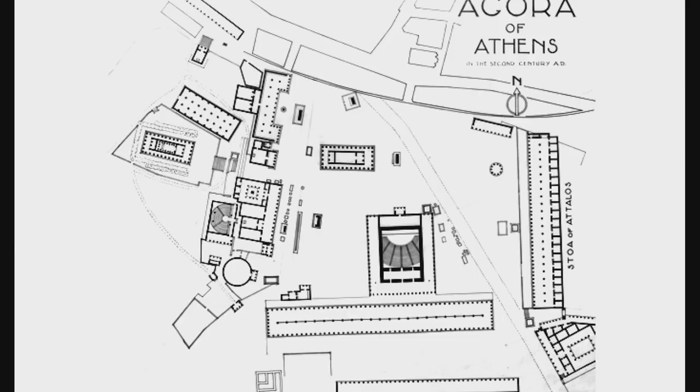There is a rich history in Western culture of how places of interaction between people, spaces of engagement, have been evolving, but they have always had a strong presence. From the Greek agora, which actually means gathering, the political, economic, and social center of the Greek polis, an interstitial space between all the different programs, to the Roman forum, where religious and civic activities blend, with temples, basilicas, shops, markets.

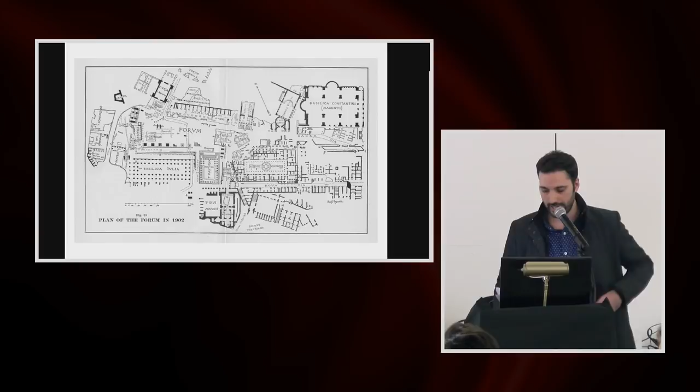Moving forward to the 60s or 70s, the public space had a very strong political connotation, giving certain demonstrations, and that led to the conversations around the right to the city.

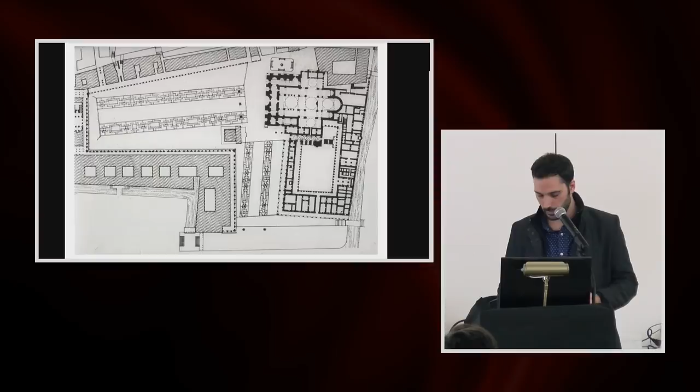However, nowadays we believe the contemporary public space is somehow under threat. There's a reduction in use of public spaces, given the pressure from capital and privatization, and also the development of technology. So public spaces are being reduced, and there's a disconnection between the public space and the user.

So I'm going to explain 4 projects, competitions we've done in the last few years. The first one is called Rethinking Someș. Someș is the name of a river, the main river that crosses the city of Cluj-Napoca in Romania.

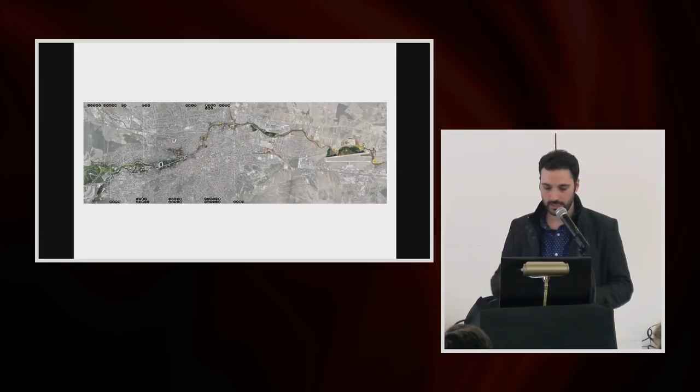This is the proposal throughout its 15 kilometers. One of our main ambitions was to turn this river into the main connector of public spaces, as opposed to understanding the river as one line that divides the city into two parts. Instead, we understood the river as a wide band with the capacity to include public spaces, green spaces, and different ecological environments.

So the project was this system of connected public spaces that also included a network of bike and pedestrian paths. This is one part of it. As you can see, this is, for instance, a stadium, just to give you a sense of the scale of the project. Basically, the whole project consists of public and green spaces next to the river.

The width of the project also varies. It goes from only 20 to 30 meters in some areas, and then as it incorporates new public and green spaces, it gets wider and wider, up to 150 meters.

So as I was mentioning, the river is an element that has the capacity to establish a connection and link a system of public spaces within the city, as opposed to being a barrier.

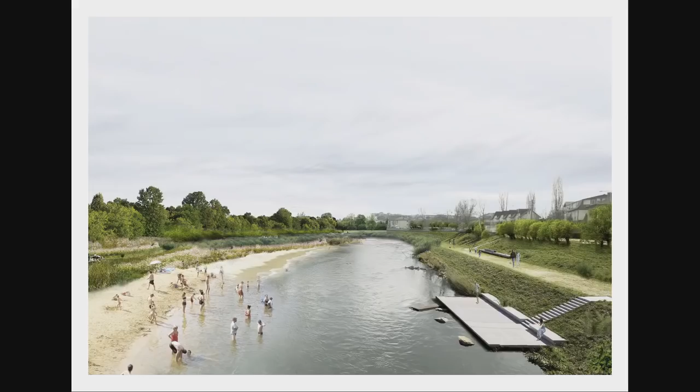Another main goal of the proposal was to somehow bridge the gap between the city and the river by reformulating the edges of the river. In some cases we included beaches, in other cases a system of paths. We made the river accessible in order to bridge that gap.

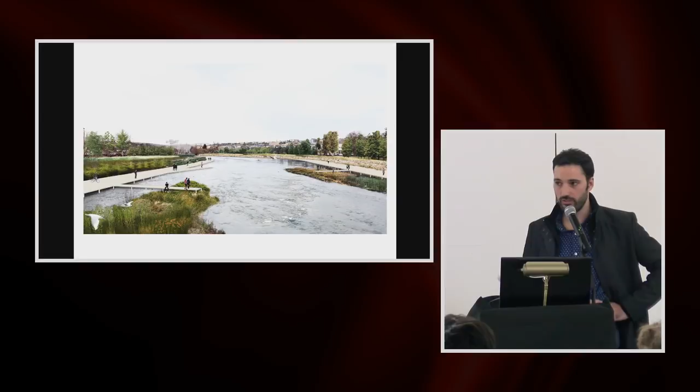The third main goal of the project was to renaturalize the river. As I explained before, the river has been domesticated by this system of concrete walls. So this project aims to allow nature to reconquer the edges of the river and also to reconstruct and recover many of the existing islands.

Even though the relationship between the city and the river is quite conflictive, there are some specific points where residents do take advantage of that asset. So the goal of the project is to serve as a kind of platform for residents to do this kind of activity throughout the 15 kilometers, not just in one specific spot.

So in order to achieve all these goals — the renaturalization of the river, bridging the gap between the river and the city, and understanding the river as an urban connector of public spaces — we had a system of strategies that were applied to the project.

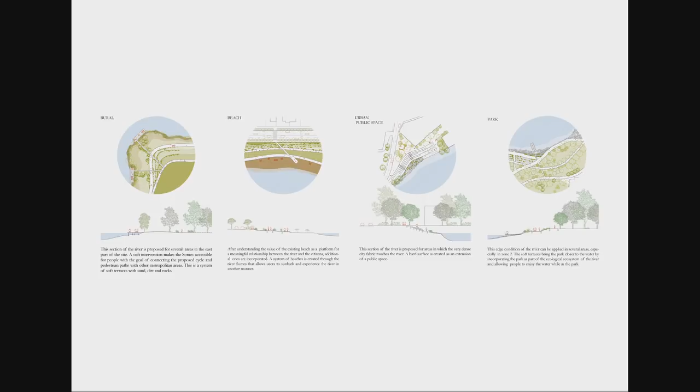These strategies were different from each other, trying to be as site-specific as possible. The entire project throughout its 15 kilometers had a kind of gradient of hardness: as you get farther away from the city center, the project becomes more natural and the vegetation is able to take over more and more. This was one of the strategies we implemented, called...

Okay, so as I was mentioning, in order to achieve this goal, we had a system of strategies that we were implementing.

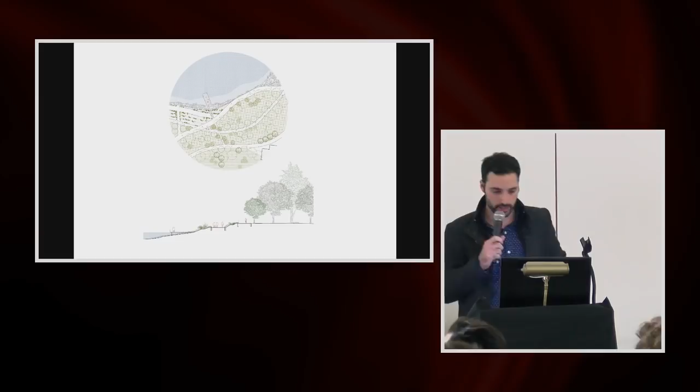This one is called soft terraces. Basically, we propose a system to redefine the hard edge by proposing a system of soft terraces that will allow the project and the river to permeate into the city fabric.

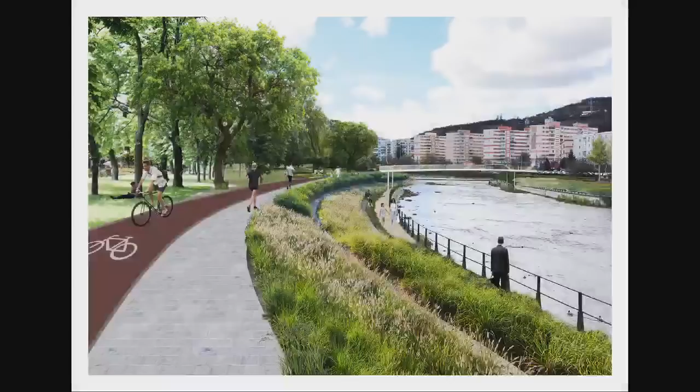In these cases, the section of the river is widened, and the existing hard edge is transformed into a more soft and natural environment that includes local vegetation, rocks, sands, and so on. This system of terraces allows the river to become more accessible and incorporates areas for recreation where a diverse range of activities could take place.

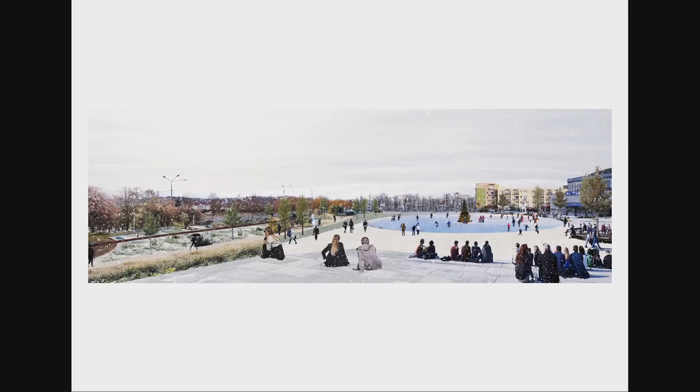As I was mentioning, the width of the project will change throughout its 15 kilometers, encountering a system of public spaces or squares. We designed all of them to be as versatile as possible, allowing residents to reimagine ways those spaces can be used, from an ice rink arena to concerts to markets and so on. Somehow the project aims to serve as a platform for residents to propose, participate, and modify those public spaces.

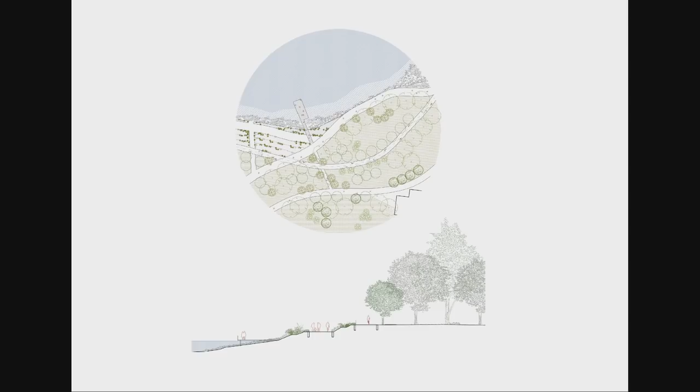The last strategy, soft infrastructure, is a system of long diagonal paths with the main goal of stitching the river with its immediate context. These paths extend the existing urban fabric into the water, establishing a more visual and physical connection between the city and the river.

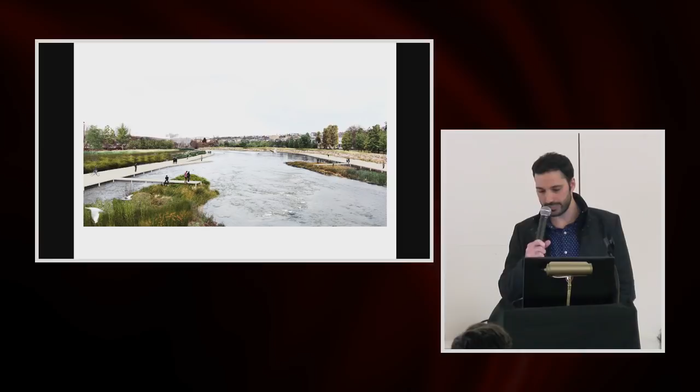One of the main features of this layer is its temporal character. The project, in order to embrace the temporal nature of the city, proposes different categories in terms of time, so that some parts are more heavy and permanent, while others are more temporal.

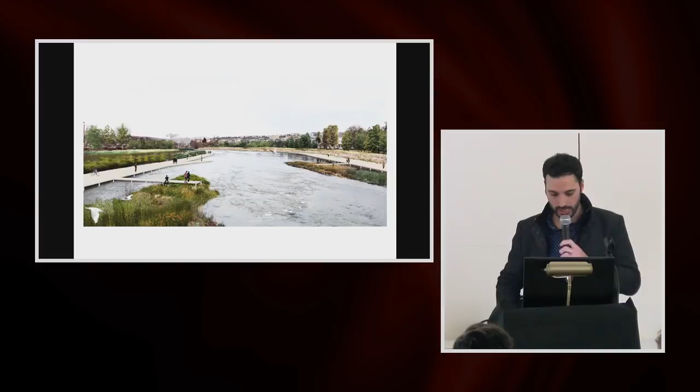This system of platforms and paths were conceived as temporal in order to allow the design itself to be more malleable and to mutate, giving answers to the futures of the city. This is a very large project—it'll take many years to get built. So we thought it was interesting to propose, in some cases, a more malleable solution to answer unknown questions the city will have in the future.

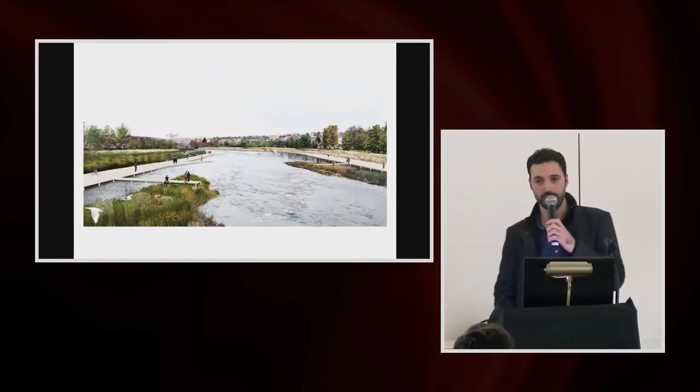As I was saying, this project is being developed. Now we're working on the construction drawings, and hopefully the next time we see each other we'll have the chance to show some construction images.

The next project I'm going to explain is the Green City Block. This is an international competition in Malaga that we won last year, and it's also currently under development. In this case, we did it with Daroca Arquitectos, architects in the south of Spain with whom we always have a very fruitful collaboration.

The competition call was to design one chunk of a city in Malaga, and it consisted of rethinking the Mediterranean contemporary city from many different scales—from the dwelling, from the public spaces, from the mobility, and so on. Our proposal, called Al Sur, meaning 'to the south,' proposes a development.

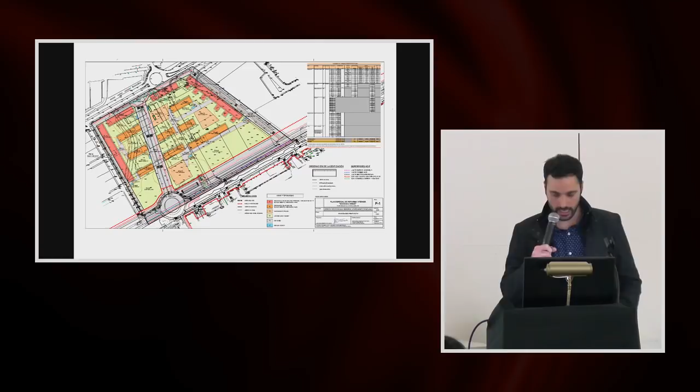It proposes a development of a typology of housing and public spaces, trying to maximize passive energy strategies. We propose a new model of urbanization, maximizing the pedestrian and ecological component, trying to make this green block an example for 21st century intervention.

We work with references, as you do. This particular one is from a book you probably all know, Architecture Without Architects by Bernard Rudofsky, which is a strong inspiration for us.

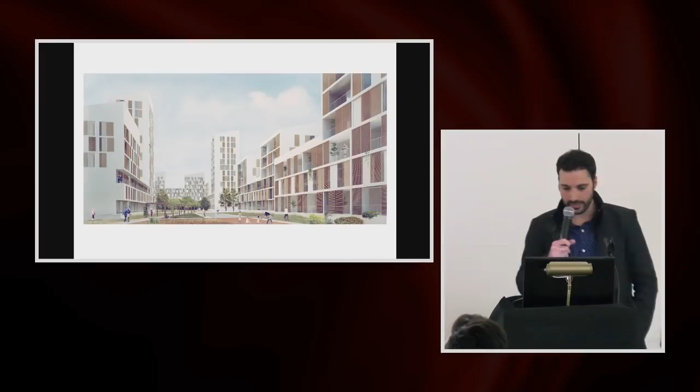As I further explain the project, you will see how we try to incorporate vernacular architecture in order to develop passive strategies of energy saving. This book is always a reference for us, always on top of the table. This project has many scales, and I will explain them from the macro to the micro.

I'll first explain the block strategies, then I'll jump into the dwelling strategies, and then I'll explain the details.

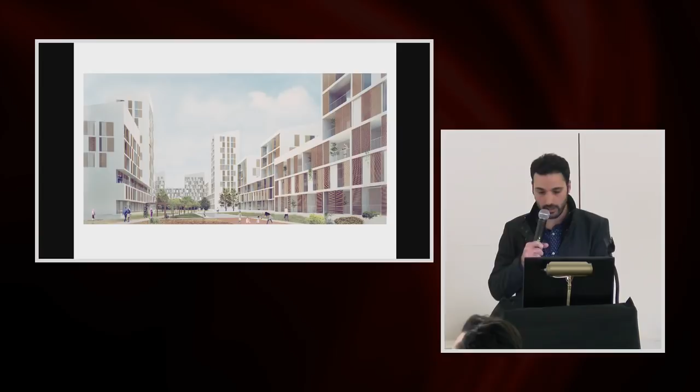This is our proposal, in which traffic and private vehicles inside the block are restricted, in order to propose a new model of pedestrian city, where most of the space is only accessible for bikes and pedestrians. All parking is reduced and located underground to provide a pedestrian and bike-friendly environment. The volumes, the white areas you see here, are organized to optimize the solar impact on the interstitial public spaces.

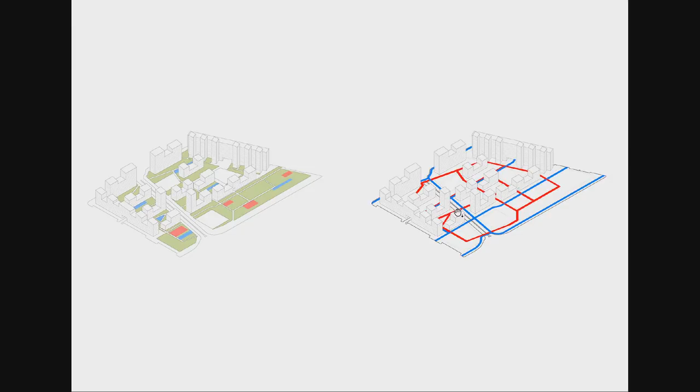The whole plot is covered by green public space, including playgrounds and sport areas, and it's also designed with a complex network of pedestrian and bike areas.

If we move to the building strategies, we can see how all the dwellings occupy the width of the floor plan, so all of them allow for cross ventilation, meaning all the dwellings have two facades.

As I was explaining before, there's a system of solar chimneys that also define the geometry and shape of the buildings. All the towers are topped off with a glass roof, and when the sun hits the air chamber connected to the core, it gets warm. In summer, the suction effect favors natural ventilation, while in winter the roof is closed and the whole chamber turns into a reservoir of hot air.

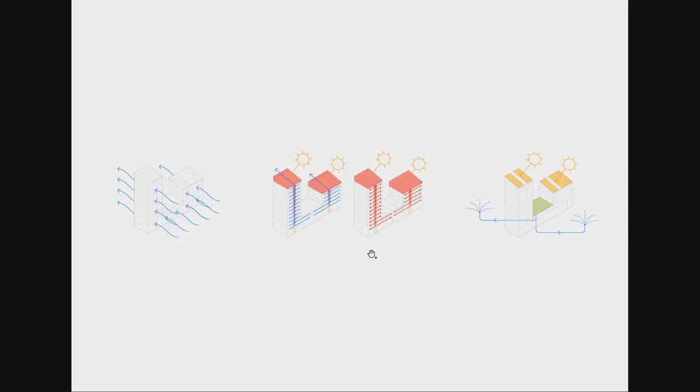Moving into the dwelling strategies, we proposed 7 different types of dwellings, partially determined by the requirements of the competition brief, such as the number of square meters and number of rooms. Some were on one level, some on two levels, but all of them had the capacity to face both facades.

All the dwellings were proposed as industrialized construction with prefabricated panels of laminated timber, and all of them had a complex system of sun protection using wooden laminated screens.

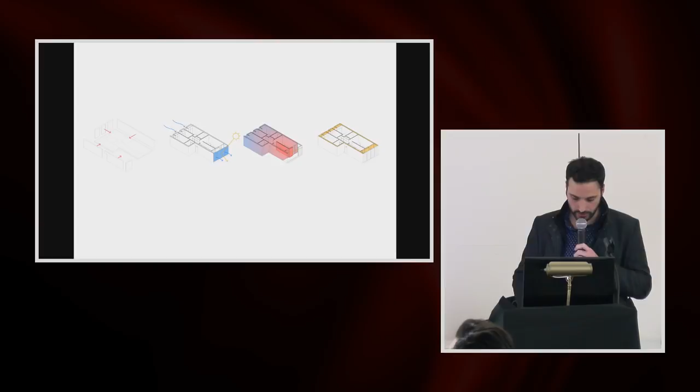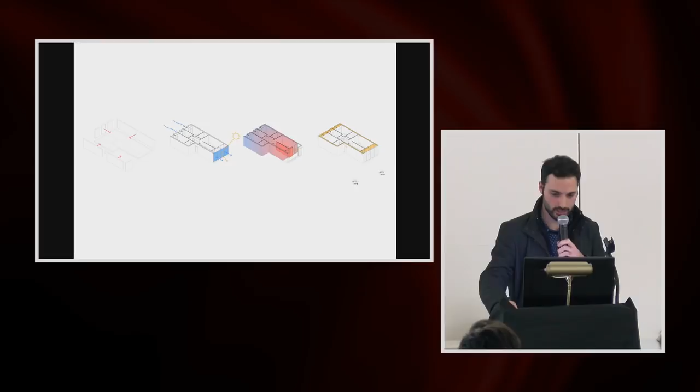In the south, in the summer, the project has a system of layers: the screens I mentioned, the glass, the terrace, and so on, which protect the building from heat. In the north, there's a very thick wall with closets inside, which also allows the houses to function independently in thermal terms.

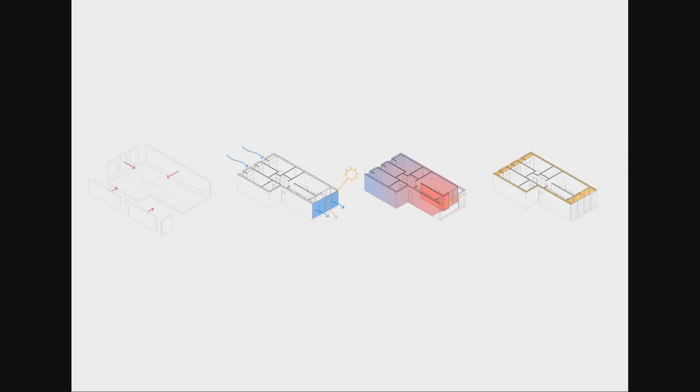Continuing with these thermal strategies, in winter the screen is open and the glass is closed, so the sun hits the interior of the building, creating a kind of greenhouse effect. At the same time, we have this L-shaped wall made of concrete with a lot of thermal mass, which collects heat during the day and releases it during the night.

As you can see in these images, this is the system of layers that composes the south facade.

The next project I'm going to explain is the most recent one, a competition we did only a few months ago at Paseo de la Castellana, the main street in Madrid, done in collaboration with Daroca Arquitectos. As with every project, it had its global component, and this project, as I was saying, is located on the main artery of Madrid.

This is the Castellana Street, where you have the main train station, the Real Madrid stadium to the north, the main park El Retiro, and in this area the main museums such as Reina Sofia, Thyssen, and Prado. So this is the location of this project, which is actually only a few minutes' walk from our current office in Madrid.

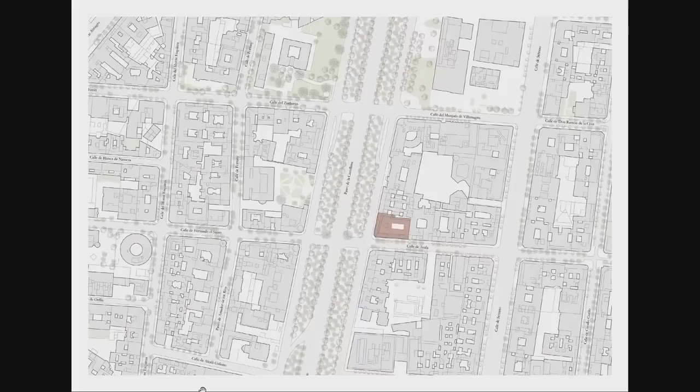So an insurance company bought this building that you can see here, which has around 8,000 square meters, or 80,000 square feet, that was built at the beginning of the 20th century.

They proposed a competition focused on the preservation and restoration of some listed elements of the project, as well as the design of a new interior office from a programmatic and environmental point of view. So there were certain requirements in which the whole facade had to be kept, also the main stairs and the lobby.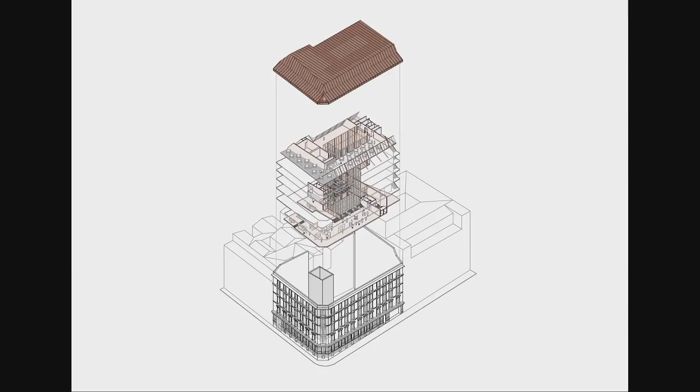The interior was expected to be demolished, with 4 parking floors built underneath, and the whole buildable area had to be increased by 20%. This is one of the projects with the most constraints we have worked with, given the parts that have to be conserved.

It's also a very interesting typology of project that is very common right now in Madrid and Spain, as opposed to the fact that so much has been built in Spain in the last 10-15 years that now there's not much to get built, and many buildings are actually empty.

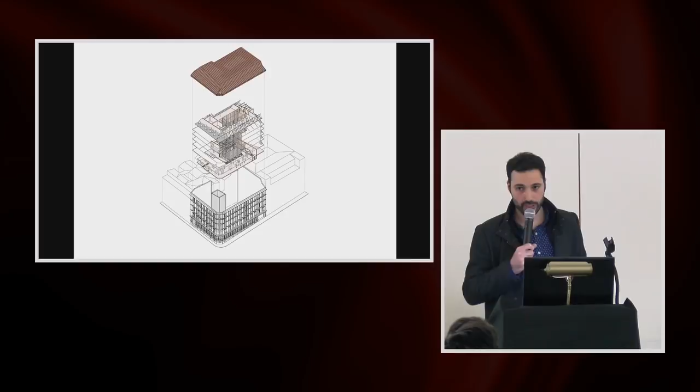Many cities were supposed to grow outwards and build new developments, but the city now is looking inwards. So there are many projects like this in which the structures have to be recycled, and there's this challenge of how you can give life to these given structures.

So this is our proposal, which aims to reclaim some kind of space of interaction and relationship for the employees.

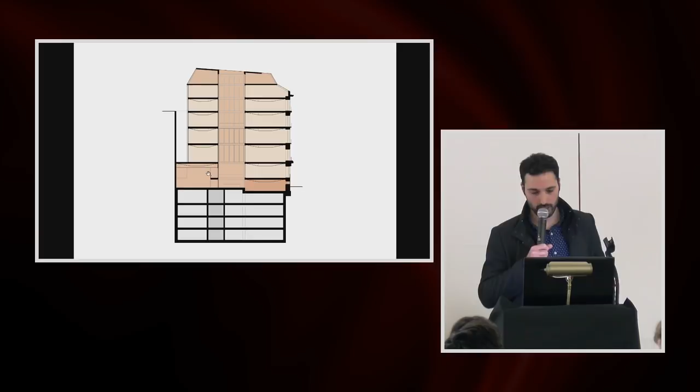The main program given by the brief was offices, but we tried to design the offices in the most optimized way, in order to leave room for spaces of interaction between the employees. This is the section we call the I, because both the ground floor and the upper floor have the lobby, the entrance, the terrace, all connected by this main atrium.

If we go through the project from the ground floor up, on the ground floor we aim to recover the main entrance at the Castellana and build some kind of sequence of thresholds, or filters, before entering the building.

So you have the existing lobby. From there you go to a larger lobby, and then from there you can access the main patio, go to the auditorium, take the stairs, or take the elevators that will lead you up.

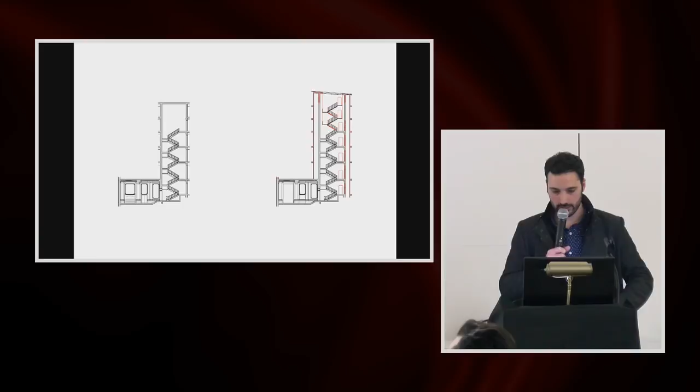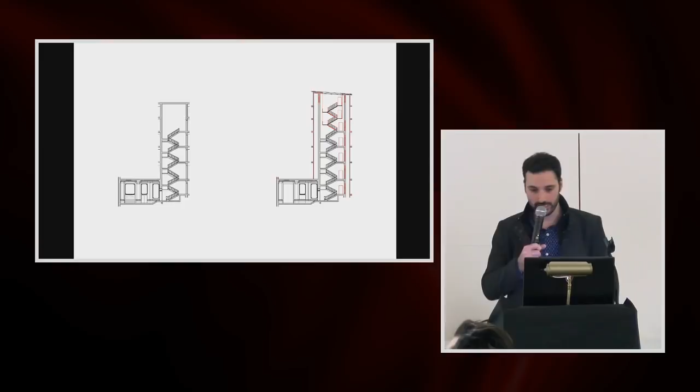As I said, the elements we had to maintain were the facade, the lobby, and the stairs. On the left, you can see both the lobby and the stairs that were part of this sequence of spaces. So we maintained the stairs and built on top of them in order to allow access to the upper levels.

As I was mentioning, the patio is this kind of main feature of the project. We decided to design only one central corridor, as opposed to the 3 uneven corridors that already exist in the current development. We understood these corridors as a corridor-patio, the main programmatic configuration of the project, so all the programs kind of revolve around it.

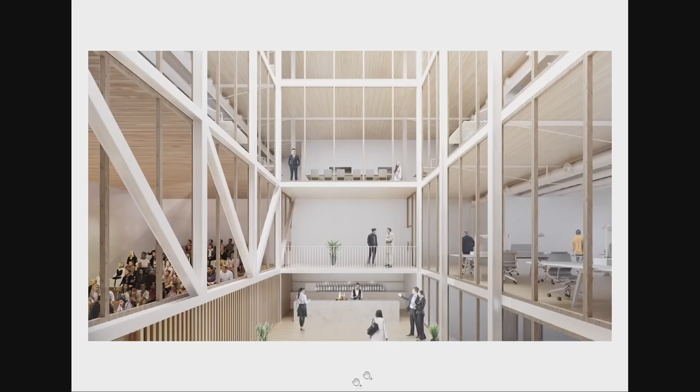So this is the main patio, which is connected to the existing stairs. This is again the main patio that connects both the terrace with the ground floor. As I was explaining before, here there are also a few passive energy strategies.

In this case, the patio ensures adequate lighting and ventilation for the future working areas. During the summer, the upper level is open in order to generate cross ventilation, while in the winter it is closed in order to create a reservoir of warm air.

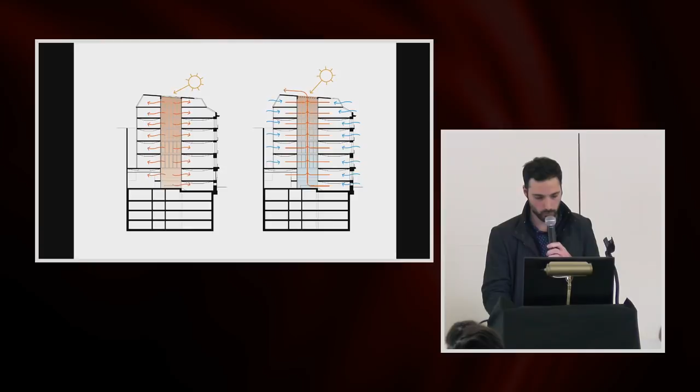One of the requirements and goals given by the brief was to achieve a net zero building. So we introduced a system of strategies like the ones I just mentioned, also geothermal energy, given that the building had to be excavated 20 or 30 meters down for the parking, and also a natural wall system that will have the capacity to recycle rainwater and increase humidity in the summer.

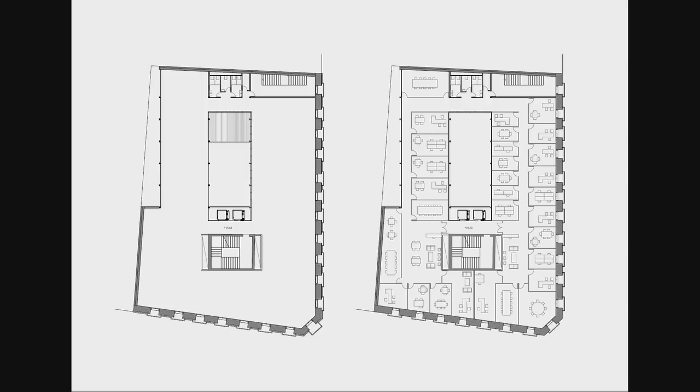It was unclear if that space was going to be divided into 10, 2, 3, or 1, even though there was one company that was the client and had already bought the plot. So we organized the circulation in such a way that will allow for possible divisions in the future.

This will be the office space in which you can see the main facade on the right, and then on the left, this main patio. This is just a diagram showing how the plan could be divided into many different parts for potential companies that would work in that office space.

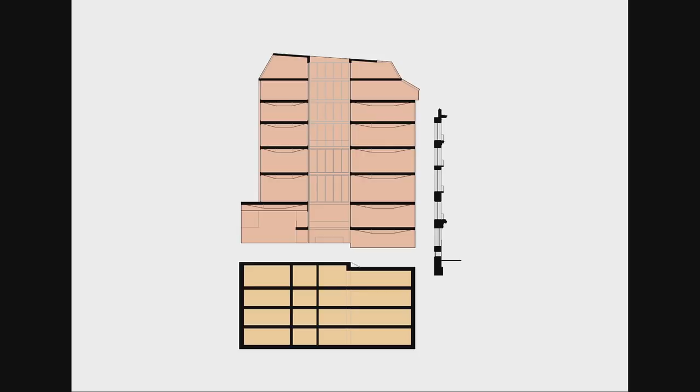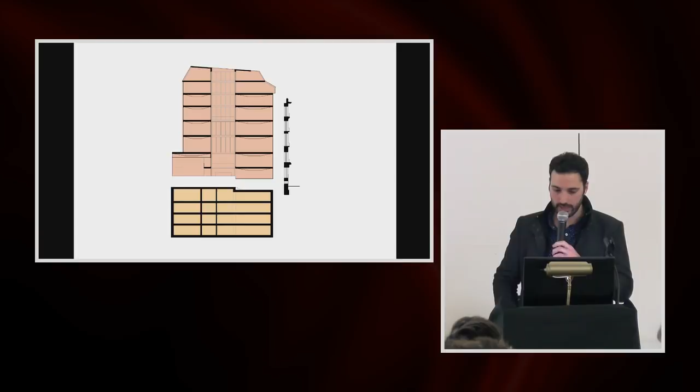That was achieved by the strategy in circulation, also with the structure strategy. So basically, the structure was either in the perimeter of the patio or in the facade, keeping the rest of the space free of structure. The structure was made out of metal and timber, as opposed to concrete, in order to reduce its load, which consequently also reduced the dimensions of the foundation.

This is a sequence of the construction process. It's fairly complex given the nature and the elements that had to be conserved. So basically, in the first phase, it was all about stabilizing and protecting the structure that was going to be kept. Then the entire building was demolished. Then the foundation of the piles was built. Then all the parking lots, and then the rest of the building going upwards.

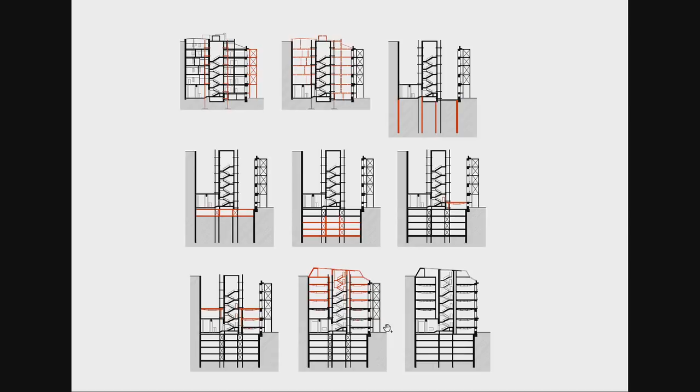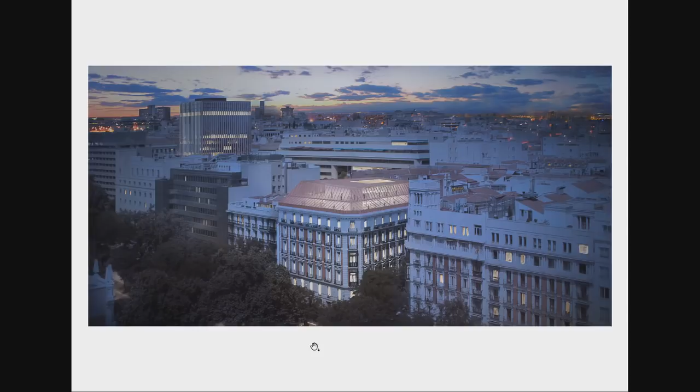As with the patio, the roof played a very strong role in the design, and we understood the roof as somehow a large polyhedral copper roof, treated as a third facade. We also wanted this roof to establish a connection with the 19th century context, with the buildings built at the end of the 19th century, beginning of the 20th century, by maintaining the existing inclination, by its geometry, and also by its color.

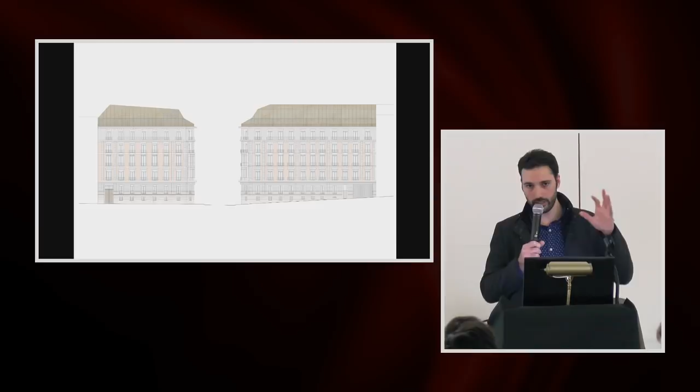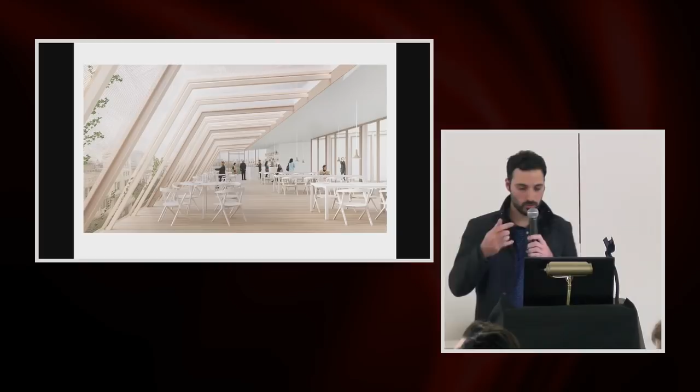Even though there was this facade, this third facade, the roof was a copper unifying element that had the capacity to cover a very complex last floor, where you have the upper part of the stairs, the gym, the terrace, the patio, and so on. Even though it was one continuous element, it still had the capacity to give different materialities of metal sheets and mesh, responding differently to the conditions happening underneath.

We could regulate the natural light. We could have terraces, like opaque areas, terraces underneath, open air spaces, and so on.

Okay, and now this is the last project that I'm going to explain, very different from the previous one. As I was saying, the other project in Spain was all about recycling existing structures, and the city was kind of looking inwards. In this case, in Santiago, I'm going to explain a new development of high density that somehow takes over an important part of the city.

We did this project with Chilean partners, Izquierdo Lehmann Architects, and again, even though the site was in Chile this time, part of the team was in Spain, and others were also in Hong Kong.

This is the city of Santiago. I don't know if any of you have been there, but it actually has 7 million people, one third of the population of the entire country of Chile. It has a ring, as you can see here, that defines the boundaries of what's in and what's out of the city, establishing a very strong connection. Not very far away, 60 miles on the left you have the Pacific Ocean, and 50 miles on the right you have the Andes. So it has a very strong topographical condition.

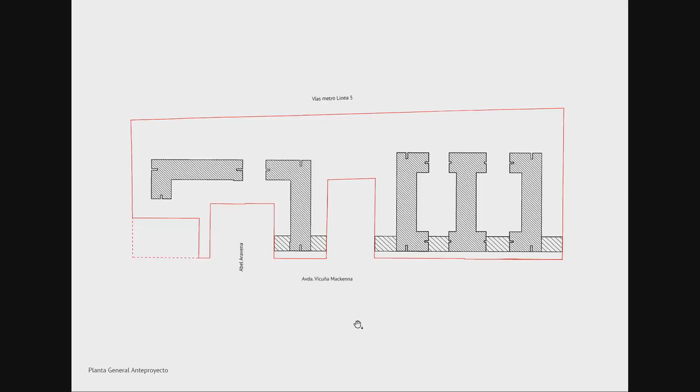The competition consisted in rethinking the project that the real estate company had already designed, in this plot facing the main street that crosses the city north-south, Vicuña Mackenna. It's around 100 meters wide, about 300 feet, and around 1,000 feet in the other direction, with train tracks at the back. We had to maintain the requirements of density and number of dwellings on the same site, but rethink the proposal already designed by the real estate company.

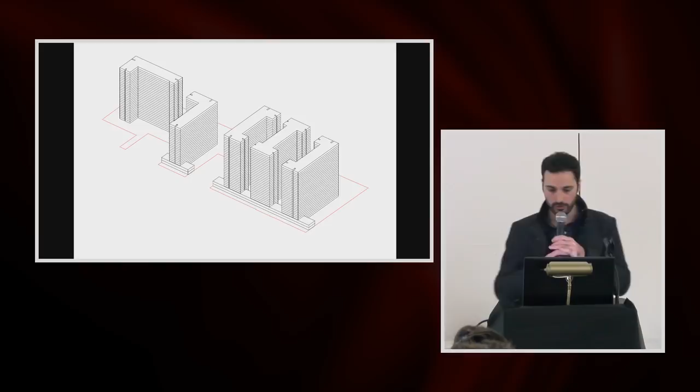This is the project that they did, and it has certain obvious problems. There are serious questions about privacy for someone living on the 3rd or 4th floor, issues of natural illumination, ventilation, and views. There are endless corridors throughout the entire spine, no real relationship with its context, and the whole ground floor is unused because it's a huge parking area.

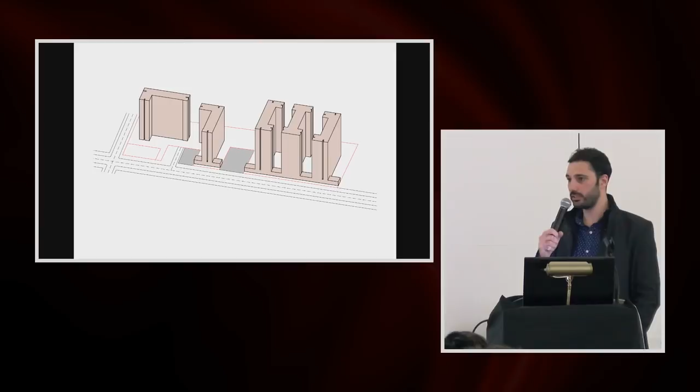When we started working on this project, there were many obvious questions. How shall we densify? How can we actually provide any public space given the extreme density? Is it possible to establish any connection with the site or not?

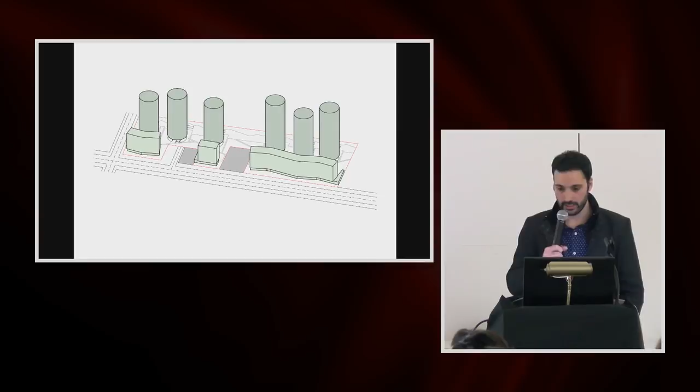So this is the project you already know, and this is our proposal, which keeps the requirements of area, number of dwellings, and so on. What we propose first is a kind of bar that creates a front facing the main street. It has 10 floors, like the city center of Santiago, so you already establish a connection with its context, allowing us to control and contain the scale and establish a relationship with the citizens.

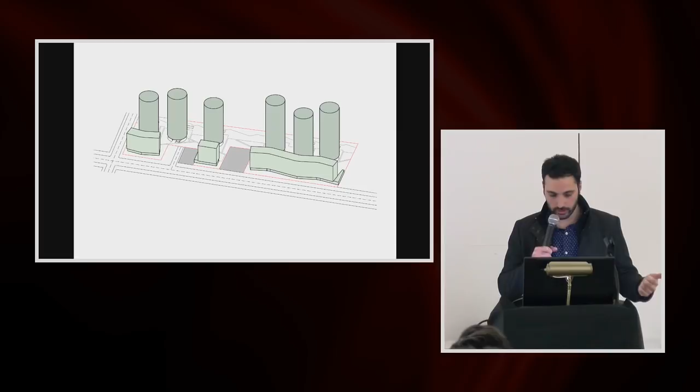The towers you see at the back are pushed back to reduce the impact on the public space. The height of the towers goes from 27 to 34 stories, and they're raised in order to reduce the density on the ground floor and intermediate levels, improve the views to the Andes and the hills, improve privacy, and create a big public space on the ground floor that can permeate into the main avenue.

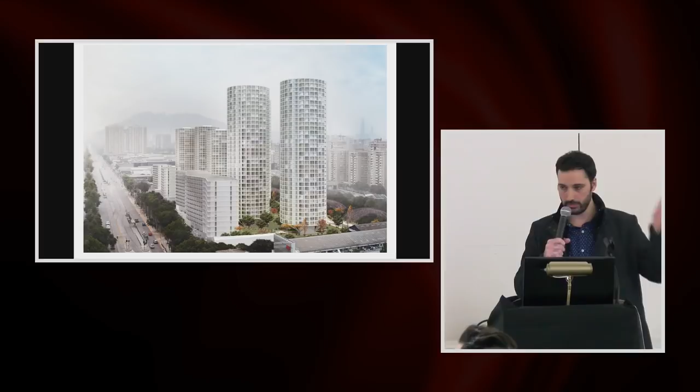This is also a good example in which we try to reclaim public spaces, or spaces of interaction between people, by increasing the height of the towers and freeing the ground floor, creating a system of pockets of public space along the main street, and creating this new front onto Vicuña Mackenna through a system of blocks that allows a connection between pedestrians and the towers and buildings.

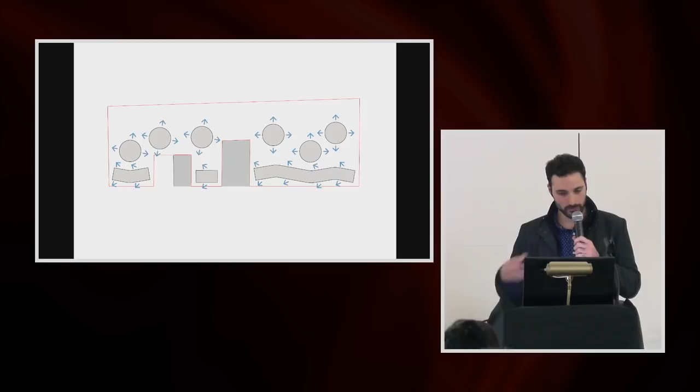So as I said, there are better views, and there's more privacy, as you will see later in the floor plans, and the project complies with the regulations given by the municipality.

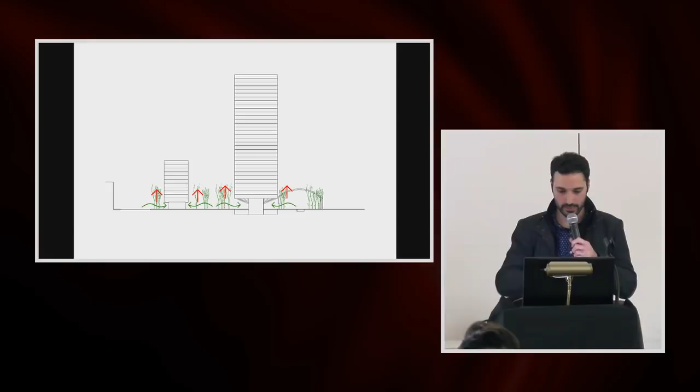So again, the project aims to lift itself and to allow a connection between the public space and the street, and also given the scale and dimension of the project, it was broken up into 6 phases.

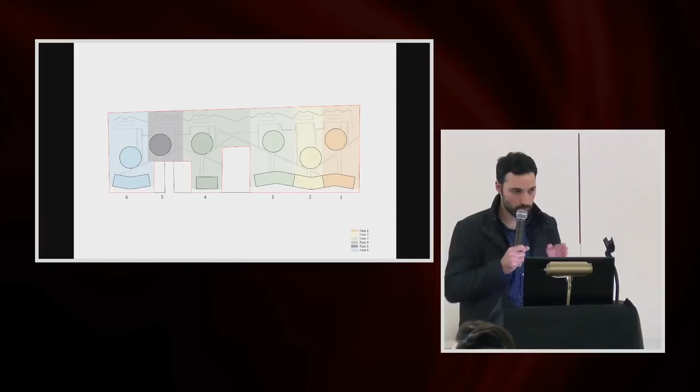The 3,000 dwellings wouldn't be sold at once, so it will be broken into 6 different phases. The system of towers and blocks was designed in such a way that this division can potentially be done in the future, and it will create small communities for each of the phases.

So one of the main goals of the project was to create this park, kind of free the ground floor, and to create a public space that will connect with the main street.

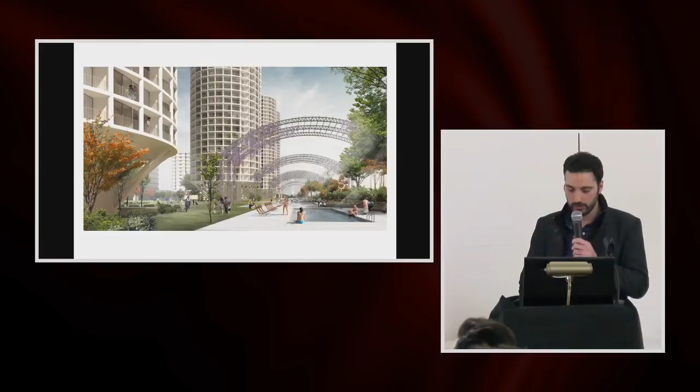We also have these structures that you see here. The site is in an industrial area, so we tried to keep some of that industrial heritage in order to maintain certain identity and character of the proposal, and also to understand that we need to build cities with the existing context and existing elements. We understand that cities get built by an addition and superposition of layers.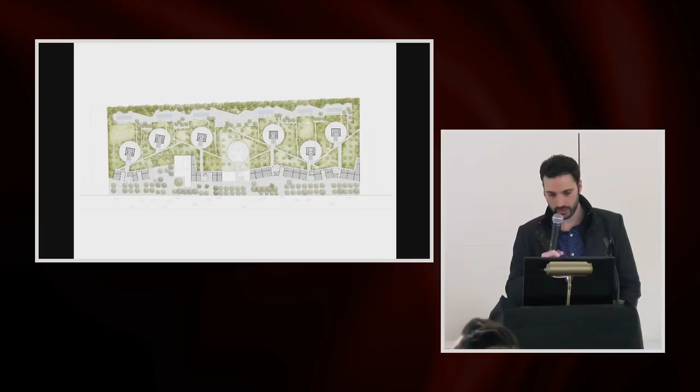So this will be the plan of the proposal, and of the park, that has vegetation used mainly as a buffer, as acoustic protection, both from the train tracks at the back and also from the main street.

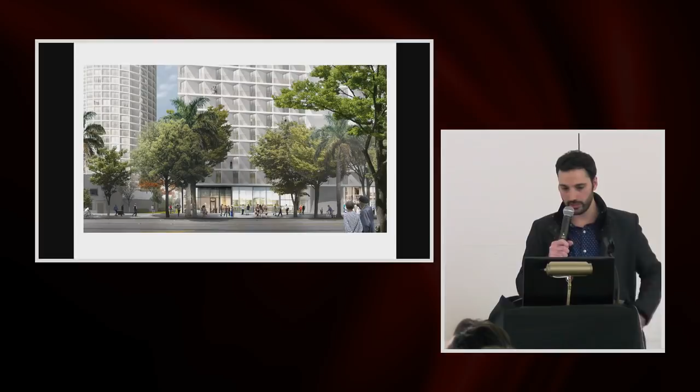This would be one of the images in which you're facing the main street. You can see the main bar, and also you can see the tower at the back. So as I was mentioning before, the bar aims to set back in some areas to create a system of public spaces.

So the bar is set back, and also it has a system of zigzags in order to create this system of pockets, and also to allow and maintain the existing vegetation, which are all these great plane trees.

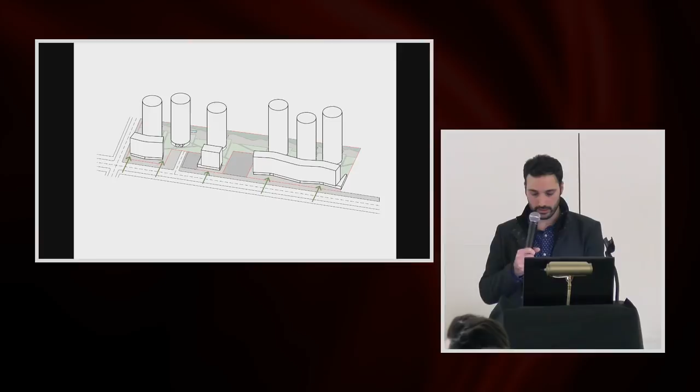On the ground floor, you have some commercial space in order to establish a connection with and animate the ground floor.

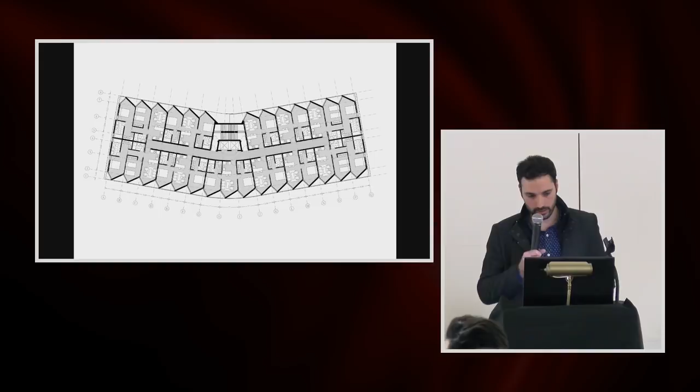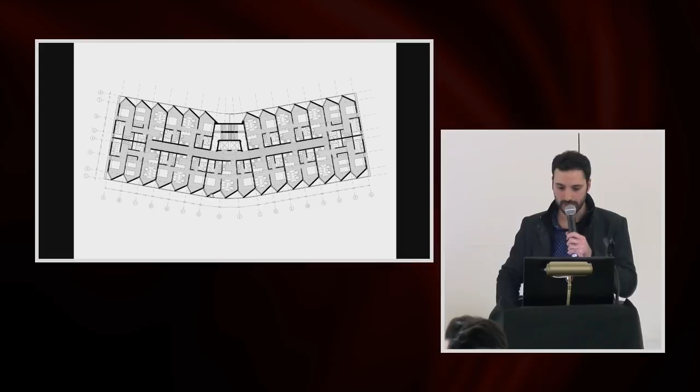And then this bar also will have all the dwellings facing north, which is the best orientation in the southern hemisphere. And also all of them will have small balconies in order to allow some kind of visual interaction with the public space.

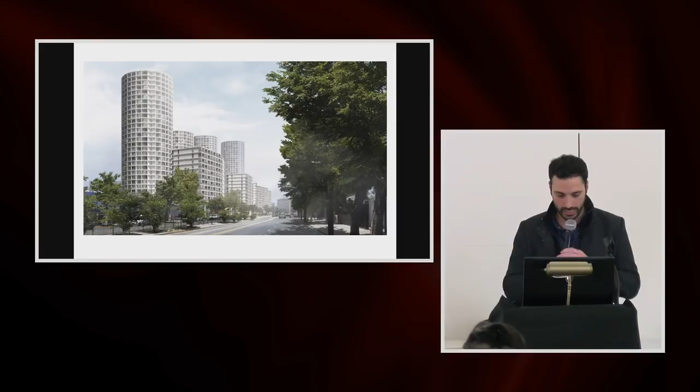The towers, as I was mentioning before, they go from 26 to 34 stories, and they aim to provide views of the Andes. This image is part of the imagination of the residents of Santiago, and it's always there, always a reference. It helps also even to get oriented. So these towers aim to establish a connection with these elements and make sure that 80% of the residents of the project will have access to these views.

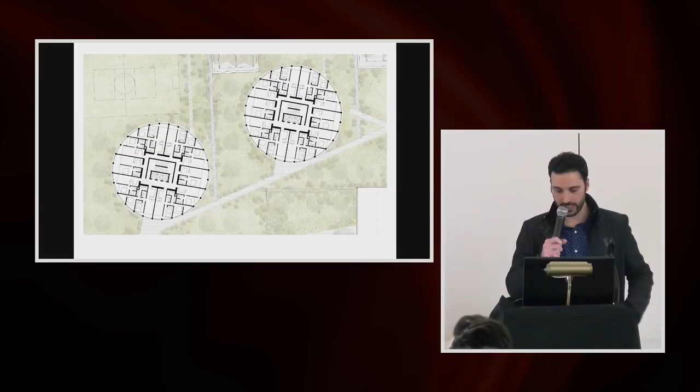The towers have this circular perimeter, but inside they have this rectangular grid. This is interesting because it allows us to maintain and ensure privacy between towers. So even though this person is living here and has this view, and this person who is living here has this view, we try as much as we could to avoid any kind of visual intersection and maintain certain privacy for the users.

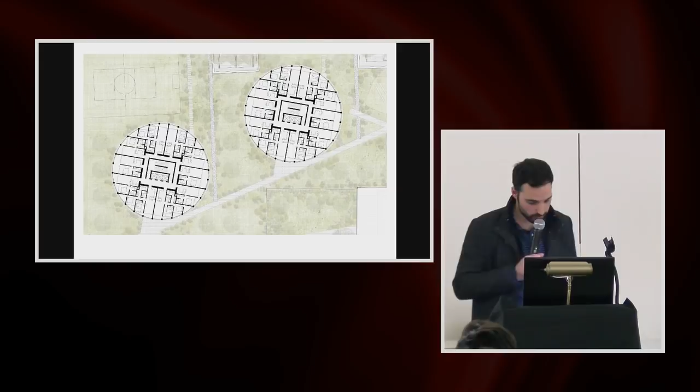The terraces are the ones that have the capacity to absorb the intersection of both geometries, the circular and the rectangular.

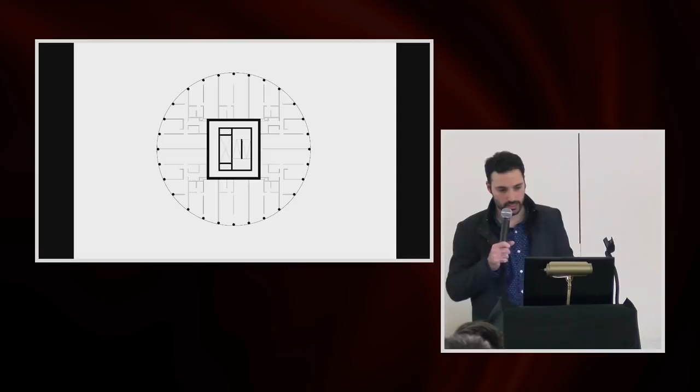And then the towers, the structural system is thought of as a system of perimetral columns and then walls in the core. That was interesting because it allows us to free the rest of the floor plan and have very thin dry walls, and in that sense optimize the floor plan.

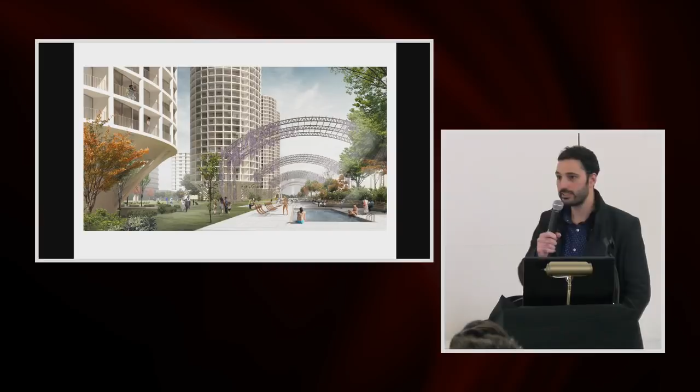Basically, as I was explaining, throughout all the projects, we see every project as an opportunity to recover the relationship with public space. Somehow create moments of socialization, create moments of interaction. Given nowadays technologies, and given the process of privatization, we think that not only public spaces but spaces of interaction are under threat. So we try with our project to give answers to those challenges.